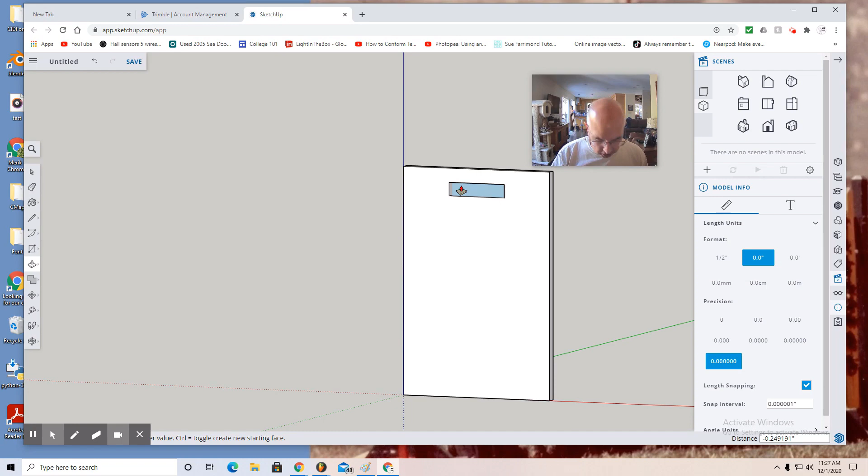Now I'm going to use the orbit tool and the push-pull tool yet again to push that opening. And as I cut into that lanyard card, I'm going to enter 0.125. That's how deep I want the cut, which is all the way through the card. As you can see, I've cut an opening all the way through the card. Now back to front view.

So the next step is to place your silhouette decal on the front of this card, down on the lower section, or maybe you want to place it up here, and you can put your name across the bottom or across the top, depending on what your preference is. I'm going to put my image across the bottom and then have my name across the top.

So I'm going to use these three lines up here in the upper left, select that, and select Insert from Computer. And there's my TIE Fighter decal. Select and open as image. And do not place it on top of your lanyard as of yet.

I mean, as on your card yet. Place it there and stretch out approximate size you want. Click. And then make sure you use this select tool in the upper left area here.

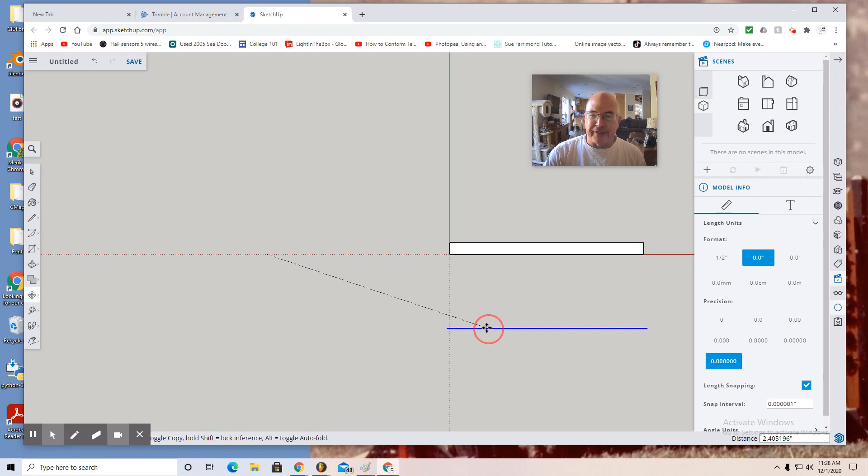Select your ID. Then move to the top view. And then use the move tool to pull your image forward and there to the right so that it's in front and not on your lanyard. And then you want to pull it and place it where it belongs. Say there. Okay. And at this point, I can, let's rotate a bit.

What I'll do next is, back to the select tool, I'm going to use that select tool to right click on my image and explode it. Don't miss that step. Now I'm going to use the bucket, but I want to select the eyedropper.

So I sample the image, click and project it onto my lanyard, then hit the delete key to remove the actual image. Now don't worry about this image at the top—that will not be printed in 3D. Nothing will be printed except just one color in plastic.

But this image is what you're going to trace now. You can put it back in front view and use the line tool to trace. I recommend zooming in very closely to trace around your silhouette shape. As you can see, I'm going to zoom in very close.

If you zoom in very close, you can take advantage of that precision setting you've set, so it will hopefully be snapping very close to the precision setting you've set. If you're far away, it won't necessarily snap as accurately, but there I go.

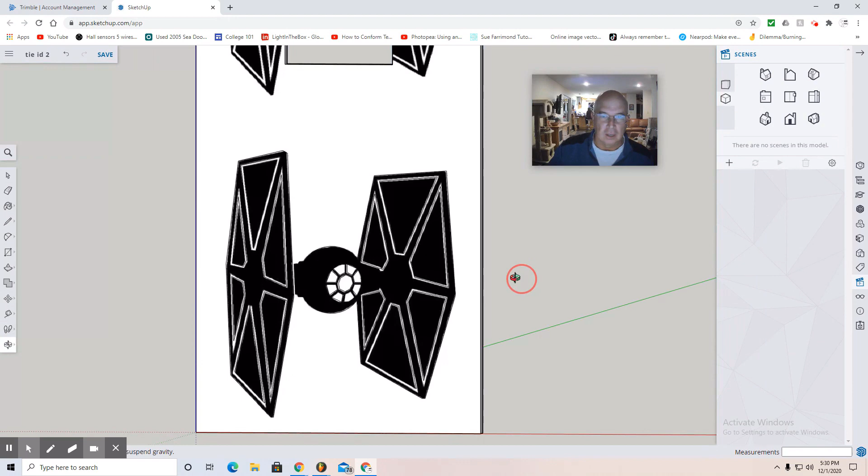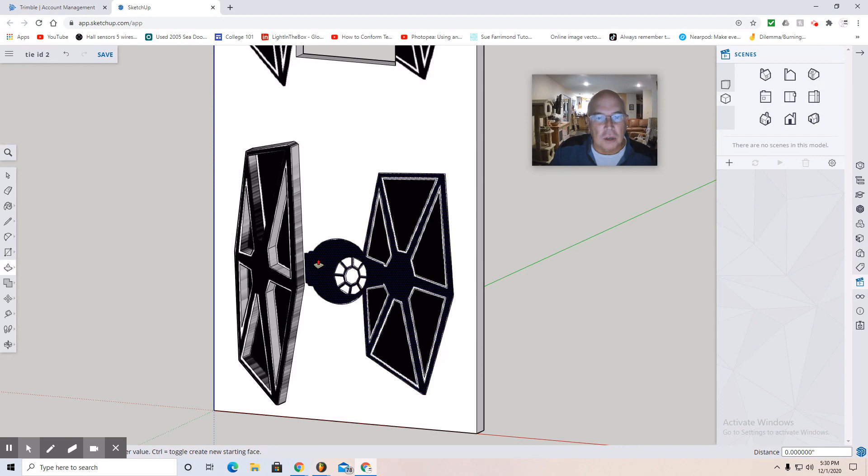Fast forward, I've traced this entire image, and now I'm going to use the push-pull tool to push-pull the various shapes. On the left side, I outlined that and I'm pulling it out. As I pull it out, I'm going to enter 0.125, and it'll extrude 0.125, an eighth of an inch. Then on this side, I select the shape and pull it out.

Oops, make sure you're pulling it out. Again, the extrusion will be 0.125 on your keypad, then hit enter to lock it in. I want you to consider keeping this simple.

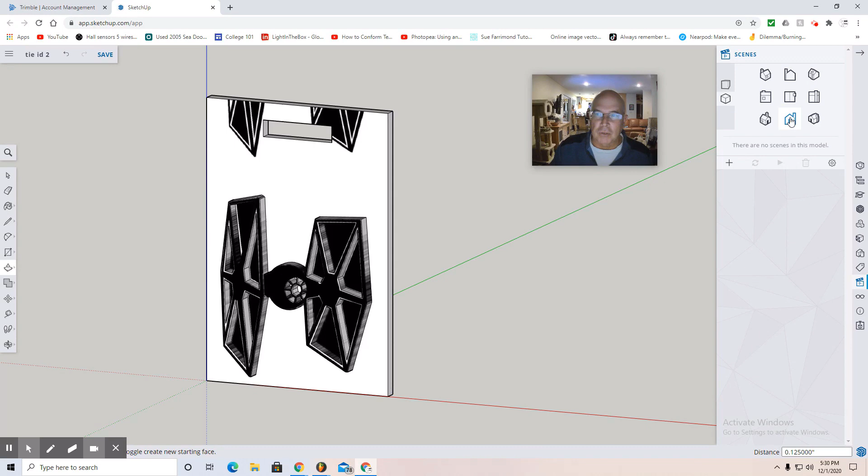So now that I've placed my shape, I'm going to go to front view again and add a name. Name, I believe, is under the rectangle tool—there's the A, so you select that and get a pop-up window that says 3D text. Here's where I suggest maybe using capitals.

You can put any name or word you want, or no words at all if you don't want to. I'm also going to pick this permanent marker shape that I like, and here notice the height—you want it to be about 0.375, so I enter that. That's 3/8 of an inch.

Also, the text extrusion should not be 6 inches, but most likely 0.125. I enter 0.125 there and click OK, and there's my name—I can place it.

If you want to, you can decide maybe if you want it a little wider, or you want to adjust it—you can also use a scale tool. You could grab the side and pull it just a little bit to extend it a little wider. That's fine—think about being a designer when you do this.

And then you can also rotate and see what it looks like—see how it extruded. This whole entire item is going to be a solid piece of plastic. So save.

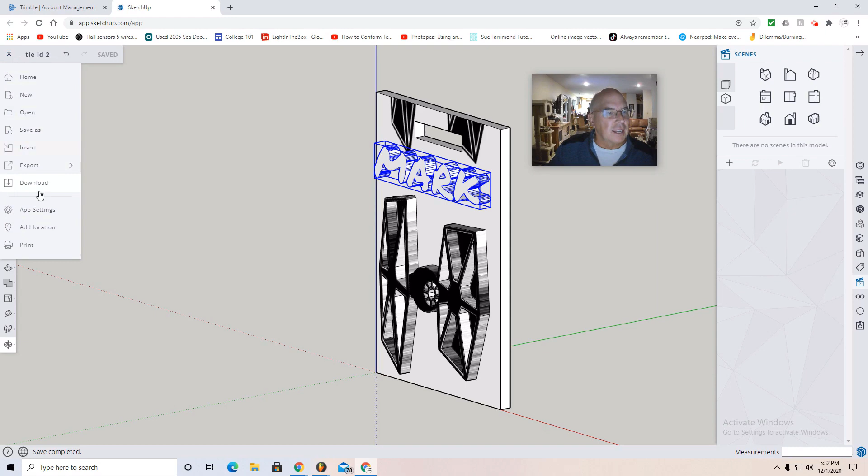It says saving—I already called it TIE ID number 2, TIE Fighter ID number 2. At this point, go to these three lines, download version 2021, your SKP model file. You select that, and as you can see, TIE ID 2 SKP, the 3D model, went into my downloads folder. So I go to my downloads folder.

With my downloads folder, there it is. Now I can, let's say, open your SKP model. Let's say that's what it looks like. I take it and export as an STL.

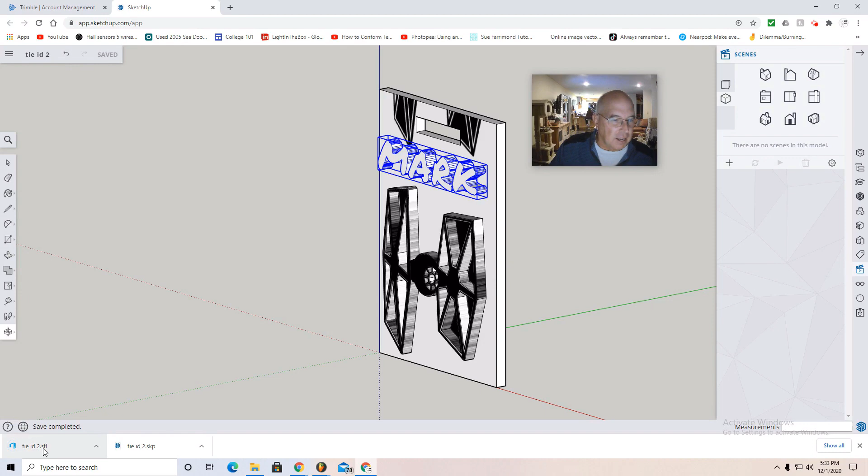That's stereolithography. So I'm exporting now, and as you can see, tie id 2.stl is in my downloads folder. So if we open up the tie STL file, that's the type of file that the printer uses.

I'll rotate it around to show you what it looks like. Again, you can pick any color in the Crayola rainbow—black, brown, blue, red, yellow, green, purple, orange. I've got silver, gray, white, pink. So select your color, and I will take care of the rest.